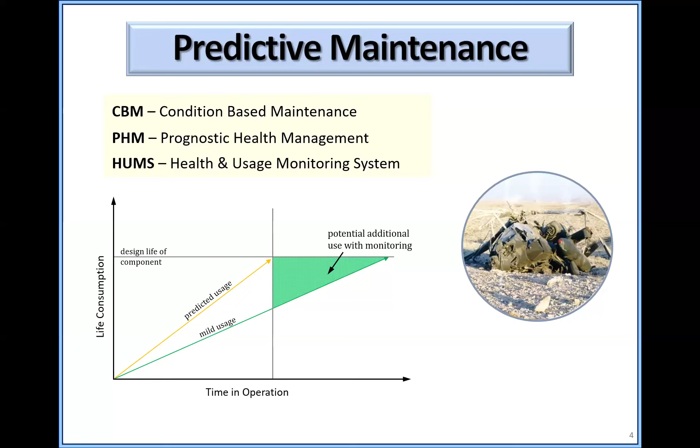On the other hand, sometimes we will have a premature failure, before the time that we have to inspect. The reason for that is sometimes the aircraft is maneuvering outside of the envelope. I had an A4 Skyhawk where the airplane crashed and the engine failed because the pilot went outside of the envelope. The temperature of the engine was too high, the blade got longer and touched the outside of the engine, broke it, the engine blew up, and the airplane crashed. So it was before the time that we had to inspect it.

You cannot find that problem just by doing this conservative maintenance. Sometimes the material that is used is wrong, sometimes the design is wrong. Sometimes there are problems that, although you spend all these millions of dollars, at the end you lose the airplane. You have a problem much earlier.

I hope this chart is well understood, because this is something that bothered me all my life in the Israeli Air Force. I felt that I'm spending most of my money... I was the one at the end that allocated the money for the different groups in the Israeli Air Force under my responsibility, and I felt that I'm putting a lot of money in the areas that Boeing, Lockheed, Israeli aircraft industry tell me to put.

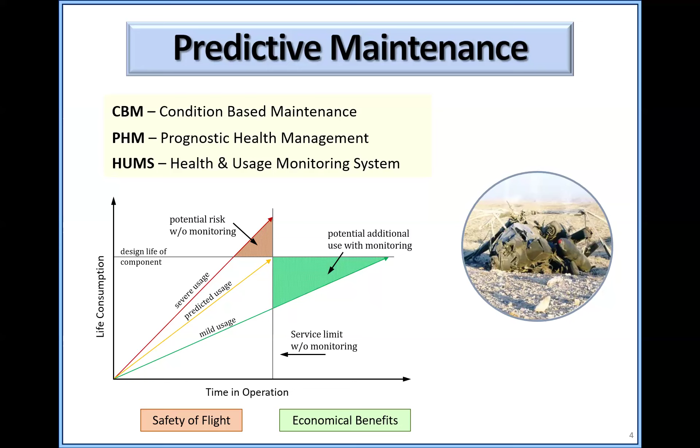With that, I came to the idea that we need to go to condition-based maintenance, and all these nice words that we are using. I'm happy that a lot of people and the DoD and a lot of organizations are using that today, but it wasn't like that in the early 80s when I felt that problem. I wrote in '94 a paper in Israel which said that we need to go for a different maintenance concept and go for condition-based maintenance.

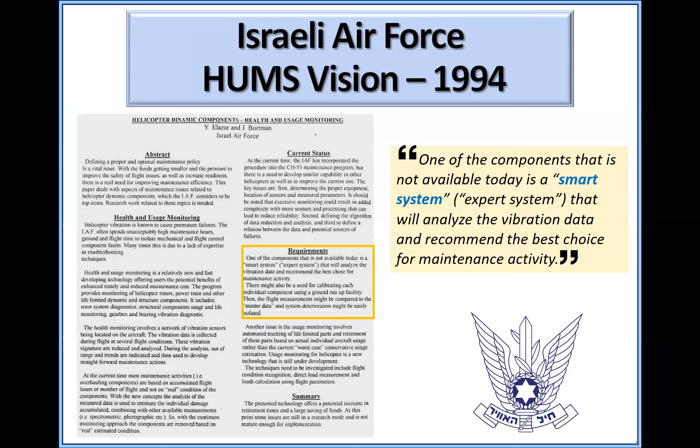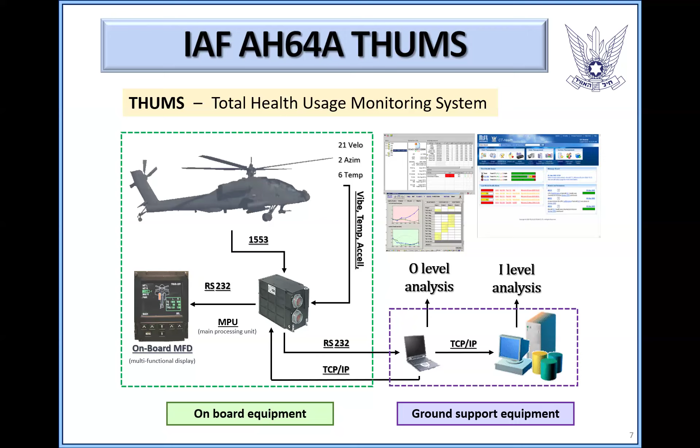In Israel, we developed a system that was installed on the Apache that collected data from 30 sensors, mainly vibrations. Based on that, we made a decision at the O&I level whether to replace parts or not. Later on, the Army and the Air Force in the United States developed something like that with Honeywell and Sikorsky.

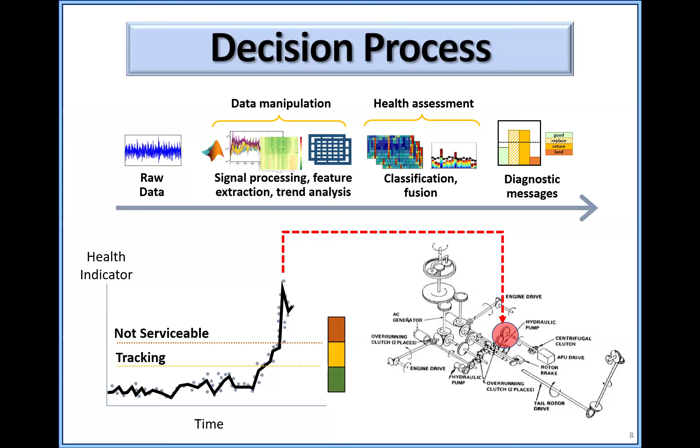Back then, the idea was to track the dynamic components of the Apache. We had critical locations, and based on the vibrations, we did analysis and had condition indicators. I'll say a few words about these things. Based on that, I was hoping we could go from the standard maintenance concept to condition-based maintenance. It was a very good system, and it's still being used, but we couldn't go to condition-based maintenance completely.

The algorithms weren't robust. We couldn't estimate the severity of the damage. We couldn't do prognostic RUL, meaning the remaining useful life. We felt the sensing wasn't good enough, and all the AI algorithms basically failed completely. We felt that we needed more understanding and better, more robust algorithms. So the system helped us in many cases find problems, but it didn't let us go to condition-based maintenance.

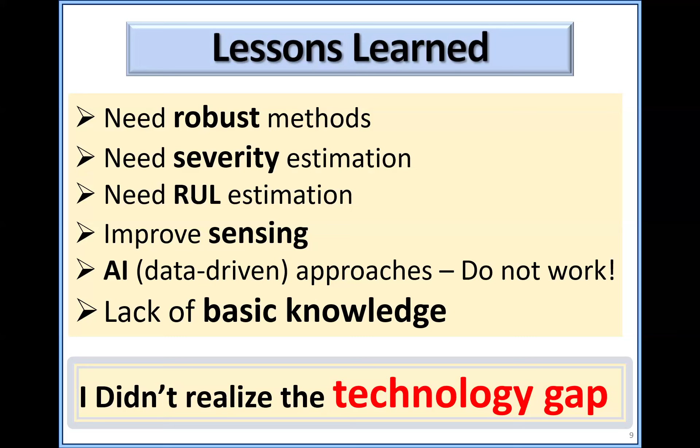So in my mind, when I retired from the Air Force, I decided to join the university. And I said, once I joined university, I'll try to develop better algorithms and better methods that I didn't have when I needed them.

One of the last things I did in the Israeli Air Force was sign a contract to buy the F-35. From our side, we put a lot of pressure on the JPO, the Joint Program Office, and on Lockheed to get some condition-based maintenance concepts. They put a lot of algorithms in the airplane, a lot of sensors, but I don't believe that even today they have full condition-based maintenance.

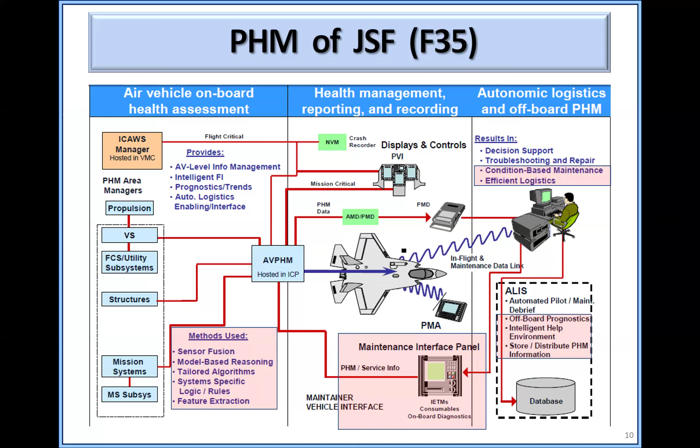The ALIS system is, in Israel at least, considered to be a very bad system. The user-friendly algorithms are not as good as they were expected. Also, the train industry in Israel is fighting to get condition-based maintenance concepts, and maybe I'll say a few words about that.

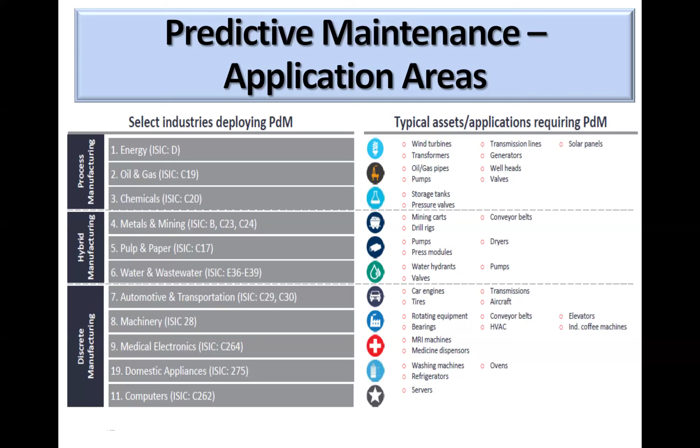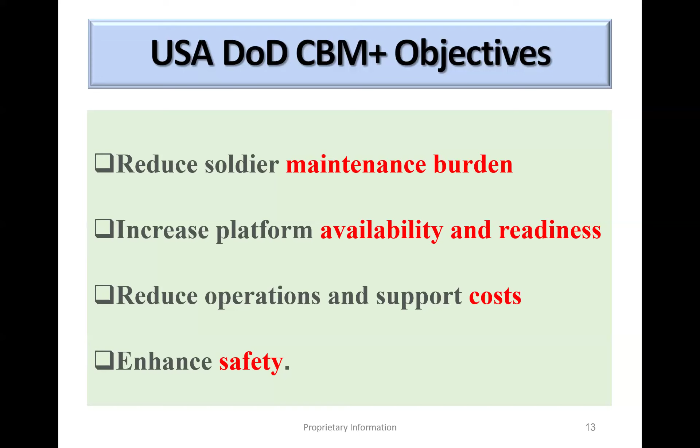The DoD, the American DoD, came with the CBM Plus. I don't know if you're familiar with that. They understand that maintenance is a big burden, and you need to improve the availability and readiness. In my opinion, it's very critical to save costs - when you spend the money, you are always limited. If you put your money on maintenance, you won't put it on other things that sometimes you need more. And even inside maintenance, it's better to do other things than over-maintain. When you over-maintain, you can cause problems too.

Several years ago, in 2022, I got a Lifetime Achievement prize at the PHM conference. I was very proud about that.

So when I established the lab 15 years ago, I wanted to create an Israeli Excellence Center for Advanced Health Monitoring for machinery. I said that I wanted to collaborate with as many organizations as possible, from academia, from industry, and so on. We have a lot of collaborations. The next time I'm going to put one more with Ed.

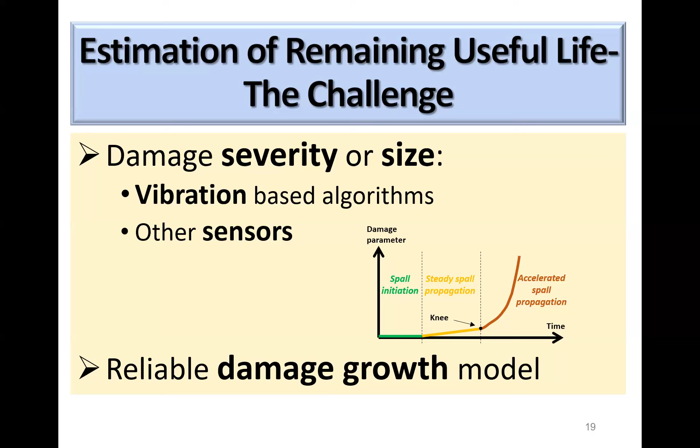So a lot of questions related to that. Although many companies and organizations say they can do diagnostics, which is assessing what the damage size is right now, and prognostics, which is what will be the RUL - for how long can I still use or fly with this component. So these are the challenges that we tried to face. And in the lab, we are concentrating on bearings and gears studies.

Basically, we started with physical models and experiments - that's what we did for many years in the lab. In the last 6-7 years, we added data-driven and AI models. And the problem is that when I was in the Israeli Air Force, I spent a lot of money with several companies that were doing AI, but the results were - you couldn't count on that. There are a lot of problems using AI in vibration analysis for health monitoring.

I'll say a few words about that later. So at the beginning, I said no AI people in my lab. In my lab, only physics-based and experimental work. You have a model, and you need to validate the model with experiments.

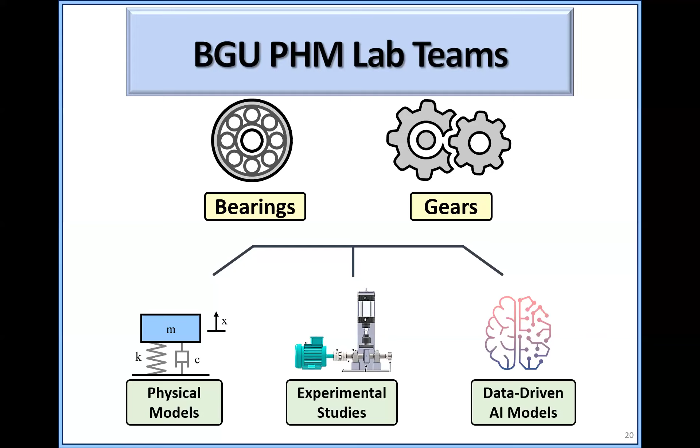And AI guys, they just want to write papers. They don't really want to maintain. That was my understanding. Well, today it's not so different, but I understand a little bit more than that. So I'm a little easier with them, but still, I think it's very dangerous.

In the Israeli Air Force version, inside there is a static swash plate and a rotating swash plate, with two bearings in between. The Israeli Air Force had a helicopter flying far from Israel. Suddenly they felt vibrations, found an island, and landed. What they found was that the bearings were broken. They were lucky to land - if they didn't, they would have crashed.

Now there's no way to inspect that. If you want to inspect these bearings, you have to remove the blades, remove the rotor head, remove the swash plate, and send it to the depot to open it up. And if you do all that, it takes two weeks before you can fly again - and you need to do that before every flight after.

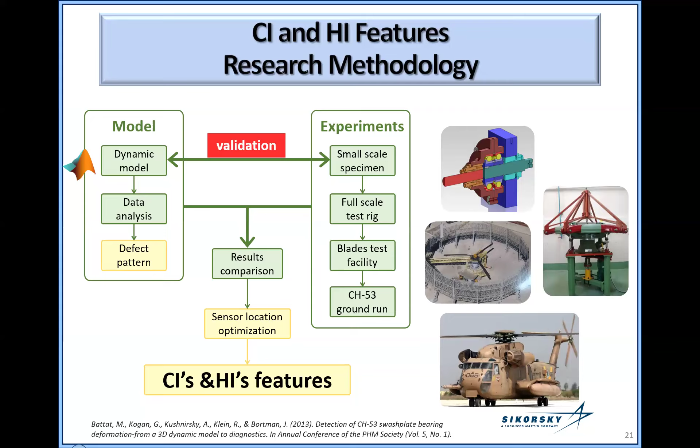So we had a lot of experiments with and without damage in the bearings. In parallel, we built a dynamic model - a student did that for his master's - and he validated the model against these experiments. Once validated, we could run many cases and develop indicators that could tell the Israeli Air Force if there is damage or not. Based on that, they are flying the CH-53. So this is an example of the work that is done.

Another type of work we do is for prognostics - we are running endurance tests. Some of the work is done in our lab, and some is done at AFRL, the Air Force laboratories in Dayton. We have a collaboration with them. They run, for example, bearings for us in different conditions.

From the experiments we get vibration levels, build a dynamic model, and use finite element analysis to calculate the damage in the bearings - I'll show you how we do that later. We also use ODM, oil debris monitoring, a system that measures the size and amount of particles in the oil. We developed an algorithm that, based on the ODM data, can calculate the damage in a bearing, for example.

We have several papers with them about that. And from the finite element analysis, we can calculate the fault propagation model. Based on all of that, we developed RUL estimation models that we are using today.

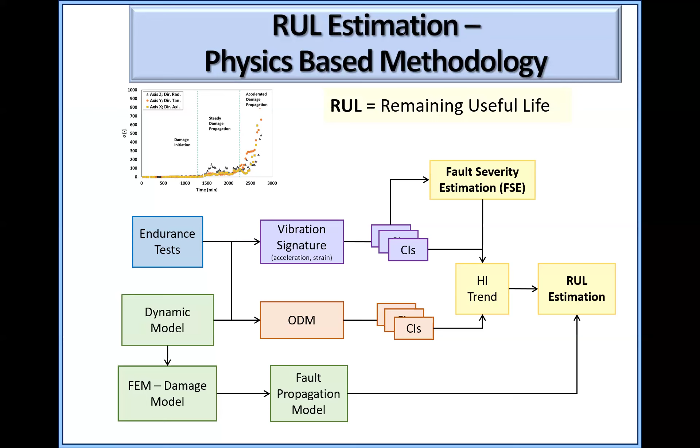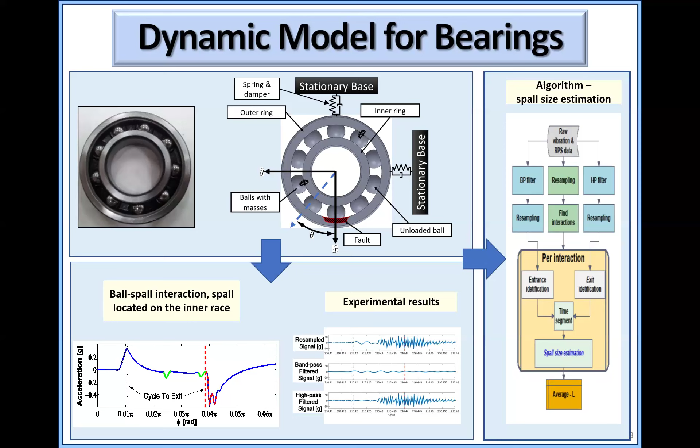And this is the algorithm - I won't go into the details, but it's based on understanding the dynamic behavior of the bearing at the entrance and exit of the fault. So this is just an example of how you can develop algorithms like that.

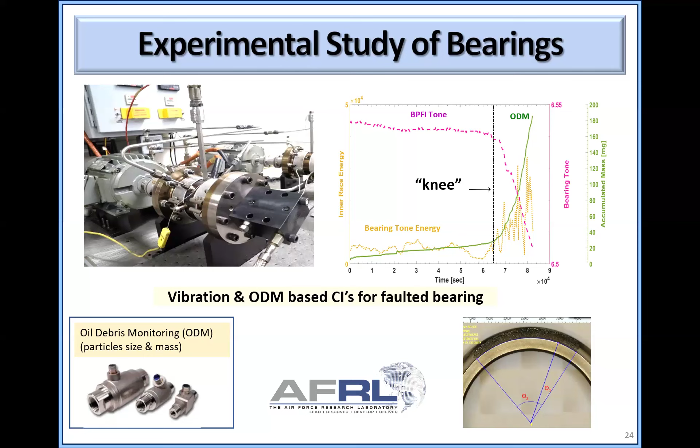Several of them are based on ODM, the oil debris monitoring. Some of them are using algorithms that factor the bearing tones. Some of them are using energy algorithms. I won't go into the details because we are short on time, but there is a lot of work that can be done with that.

This work is related to prognostics, to the damage growth in bearings. We try to understand how the damage grows in the bearings. And we spent several years running endurance tests and studying the literature, and coming up with our findings.

In the upper level, you can see the crack initiation phase, where the cycles cause some fatigue damage, and the first piece would leave after that. In the second stage, the damage starts growing, and we wanted to understand how the damage is growing.

So all that work was done both experimentally and using finite element models. And we found that the fatigue growth is caused by the ball hitting the corner of the spall after the first piece left, and two different cracks are being developed.

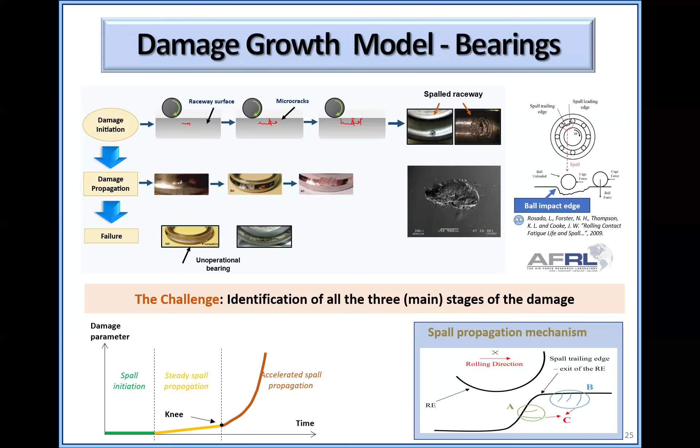Some of them are from the surface, other ones are from below, and they are connected. And then we get another piece that leaves.

You can see here simulations of the damage. You can see, for example, on the top, the cycles where the first initiation occurs. In the lower one, you can see how the hits of the ball start growing. I'll take it to different stages.

So there is damage growing up and down. And this is in a fast mode.

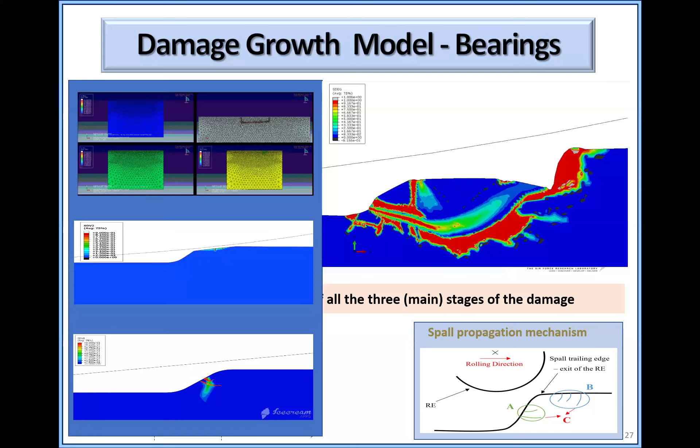So then another piece leaves, and we have a new spall, longer, and so on. You can see it in the right lower corner. And based on that, we developed a model that you can use for prognostics.

I won't go into all of that, but we have models like that for gears as well. I'm short on time, so we have indicators for gears.

I want to say a few words about sensing. We realized that accelerometers also have disadvantages, and we understand that we want to be close to the damage. We want to have a good signal-to-noise ratio. So we started using, in addition to accelerometers and measuring temperature, the ODM, FBG, and small, tiny cameras to inspect the health.

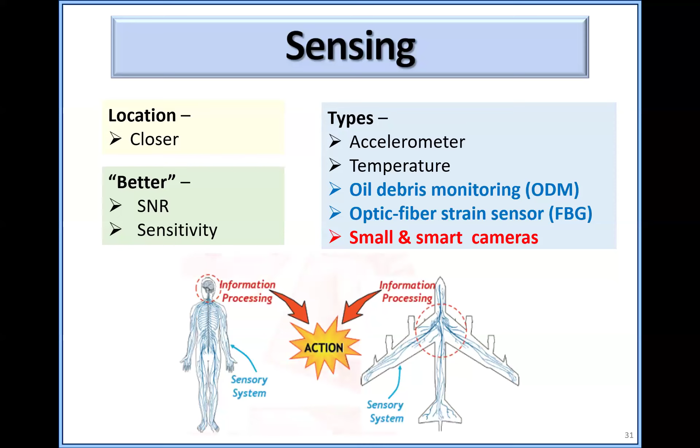Let me run quickly. Those of you using FBGs are measuring strain on a fiber optic, and from the change of wavelength you can calculate the strains. Mostly people are using it for measuring strains in structures.

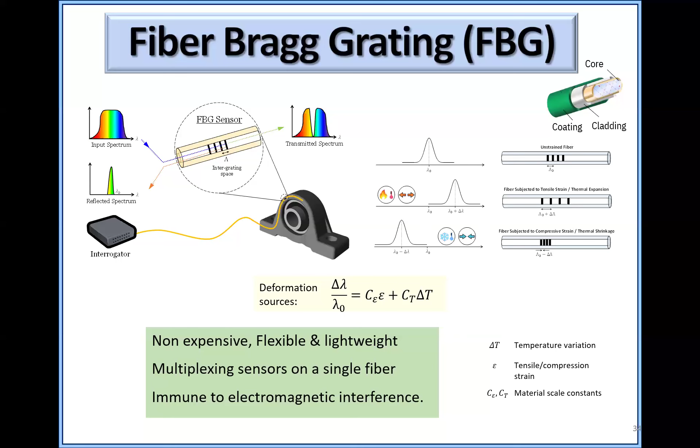We are using it to measure the behavior of bearings and gears. And we have several papers where we were able to correlate between the damage sites, different damages, to the strain level, and some analysis that we have done.

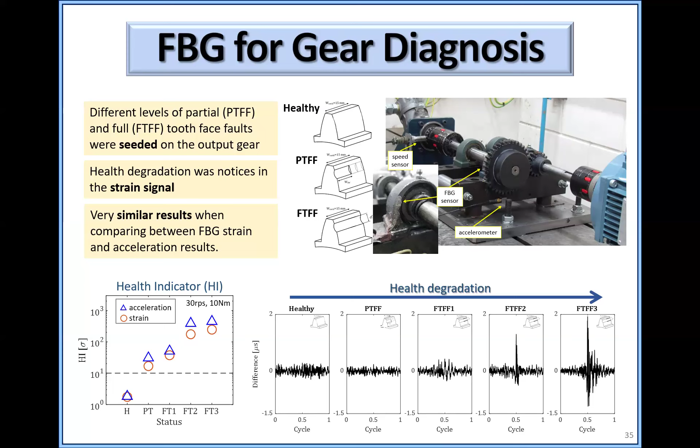As I'm short on time, I won't go into details, but if someone is interested, we have a lot of modeling.

Several years ago, I met a company that makes tiny cameras for medical purposes. They were selected by NASA to put those sensors in the satellite pipes, to check the health of the pipes before refueling the satellite. And then I said, okay, if you can use that in space technology to assess the health of components, why can't we do that in aviation?

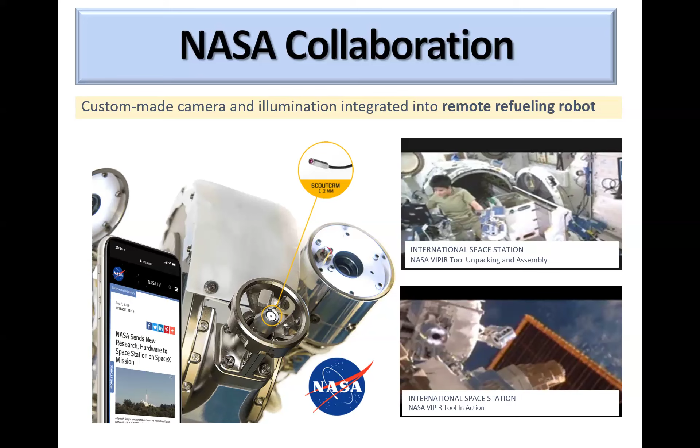So we lost in the Israeli Air Force an Apache because the push-pull rod that transferred the pedals of the pilot to the tail, controlling the tail angle of attack, was disconnected.

All these rods which are outside of the airplane are inspected every pre-flight. And the ones that are inside, in order to reach this point that you can see in the red mark, to see this connection, you need to remove the pilot seats, you need to remove the fuel cell. It's a long, long way to inspect that, and you cannot inspect that.

So what we did with that company, we installed those tiny cameras inside that bay. You can see a picture taken, and we connected it to a plug. And now the technicians connect to the plug, and they can see in the iPad the integrity, they can check the integrity of the system.

So with this concept, you can inspect areas which are not related to rotation, areas like landing gears, and many other areas. You fly with the camera, you don't need to do anything, and you can inspect it.

But then I realized that if you have a good picture, a good image, you don't need the technician. You can just put a computer on board and develop algorithms that will check for corrosion, for the safety wire that is there, the solid parts should remain solid.

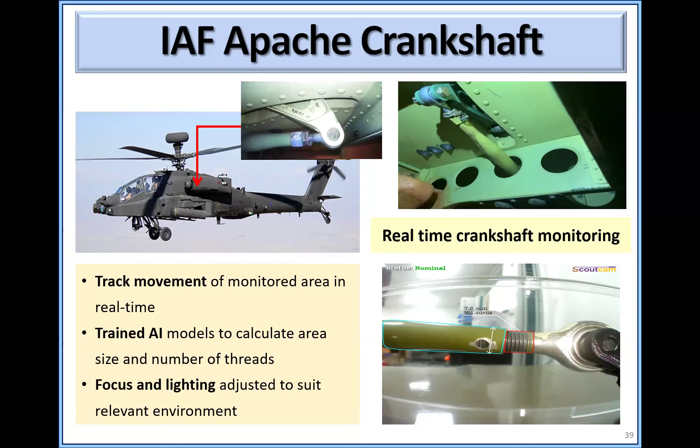And from that point, the company changed direction into aviation. And there are, for example, applications for landing gear. You can check if there is leakage in the landing gear.

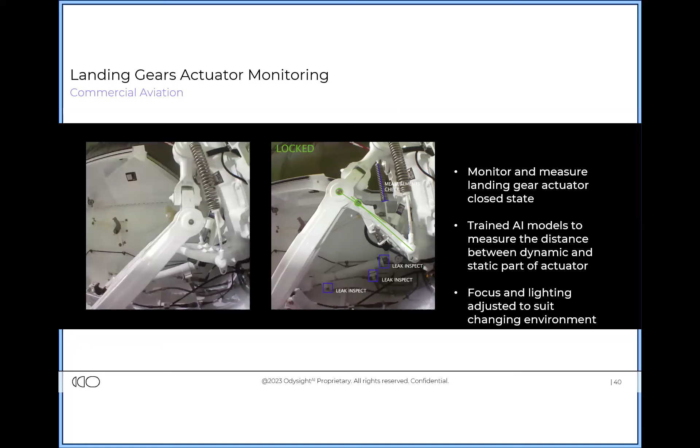You can check from the trajectory of the landing gear that the bearings in the different locations are not wearing out. We lost an F-16 in the Israeli Air Force because during landing, the locking system jumped out, the main landing gear collapsed, and the airplane turned over. The pilots were lucky enough to eject in the last minute.

Today, you can eject on zero-zero. On the ground, you can eject safely. So they were lucky, but we lost an airplane. And the bearings were completely worn out.

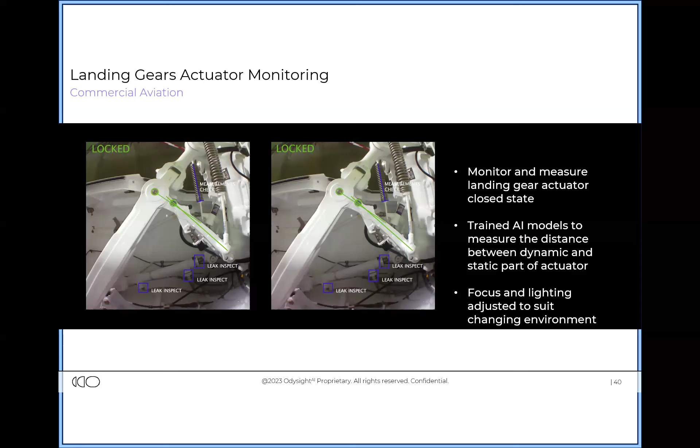We are installing now in most of the Israeli UAVs, tiny cameras connected to computer, and areas like belt integrity, filters, throttle. Many inspections are done with the system by itself with no technician around.

We started saying that we don't have a pilot. The pilot is remoted, and you don't need a technician as well. The airplane can inspect itself, let you know that everything is okay and is ready for the next mission. So you improve the readiness.

You don't have to open panels. And the camera is not tired. It can do the work in the middle of the night.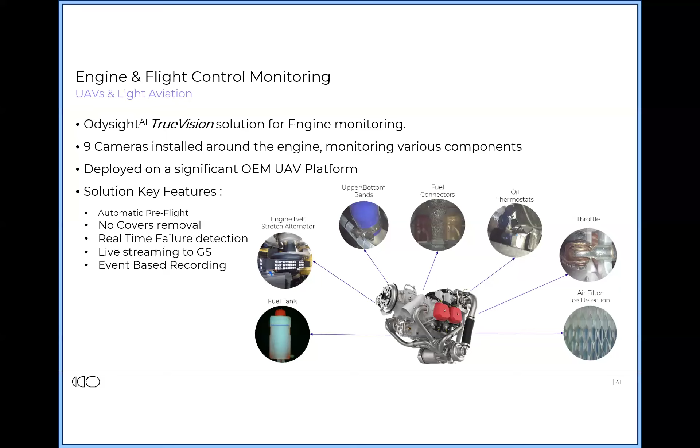When I was the head of the maintenance unit, when the helicopters used to land, always they land at midnight or very late, and then you send the technicians to inspect the airplanes for the morning flights, and then you are not sure that they can do the work as accurate as needed. They are tired. A camera doesn't get tired, and the probability of detection is much better.

So we have a lot of applications today.

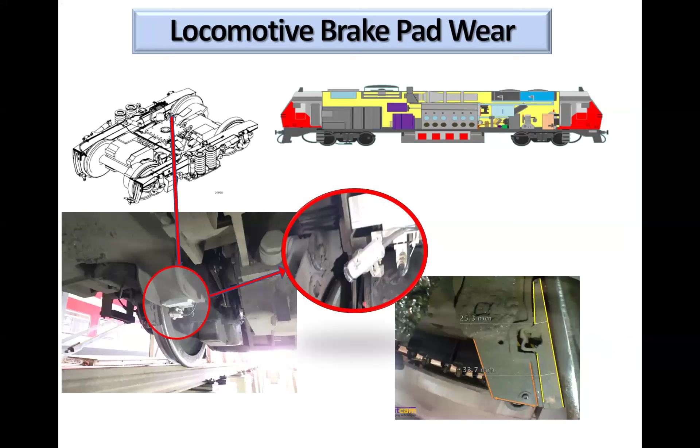Let me jump ahead. I'll say a few words about AI.

Deep learning for fault diagnosis of rotating machinery using vibration used to be a kind of buzzword, and there were several waves of deep learning. I'm not an expert, not in deep learning. I'm not an expert in that area.

I'm working with experts, but I remember when you couldn't get a grant if you didn't write AI in your grant. In picture classification and speech recognition, there were a lot of revolutions, and they developed features to identify what you have in a picture and so on.

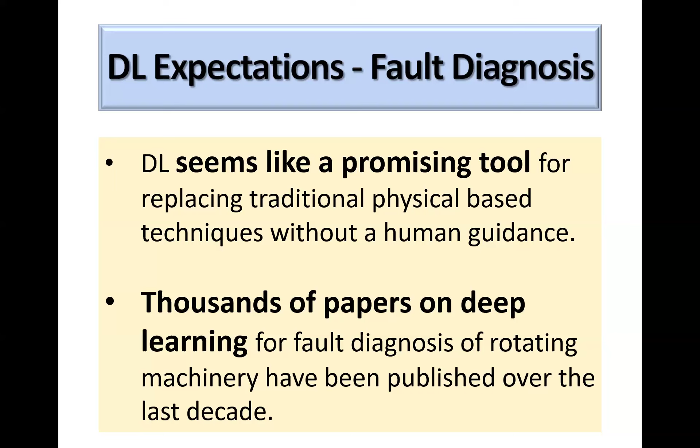And it looked like a very promising tool, not only for these areas, but also for analysis of the vibrations that we measure with accelerometers for health monitoring. There are thousands, maybe millions of papers written about using different algorithms and different methods using AI for assessing the health of machines.

And the real problem, in my opinion, one of the problems, is that in the critical locations you have very, very, very few, even sometimes zero, data about...

...failures in critical locations. For example, in the F-35, as far as I heard, they are planning to develop the algorithms after they have 200,000 flight hours. That's what I heard. Now, I hope in the first 200,000 flight hours, they won't have too many failures. They won't lose thousands of airplanes because of damage.

So the database that they will be using is probably few-shot or zero-shot learning. And the problem is to move from experiments to real life. You cannot do that directly.

Transferring across different conditions, different machines. Even if you're using the same bearing on the same machine several times, you'll get different data. And you need a lot of labeled data in order to train your system, in order to use it.

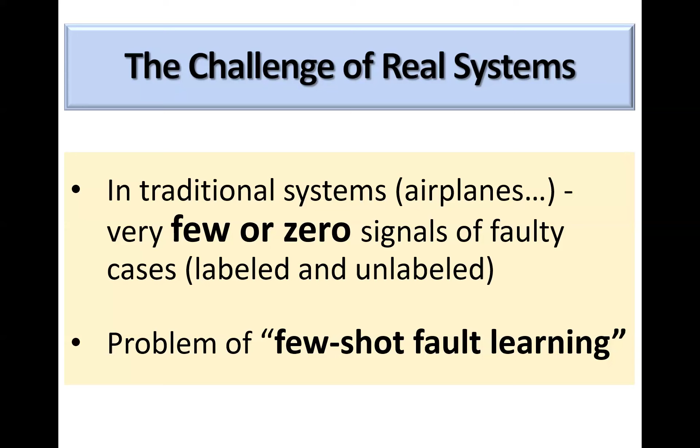So in my opinion, no one is using AI-based algorithms alone for critical locations to maintain its fleet. That's what I think. Of course, I didn't visit all the air forces and all the users, but those that I visited, they are not doing that.

One challenge that we realized, and we are trying to solve, is to transfer in an identical machine from different operating conditions, meaning I train my data on certain conditions and I move to other conditions. The other one is to transfer from different machines, meaning I learn on one machine and I go to another one.

If we solve this, probably we could develop algorithms training in the lab, and then use it in the airplane.

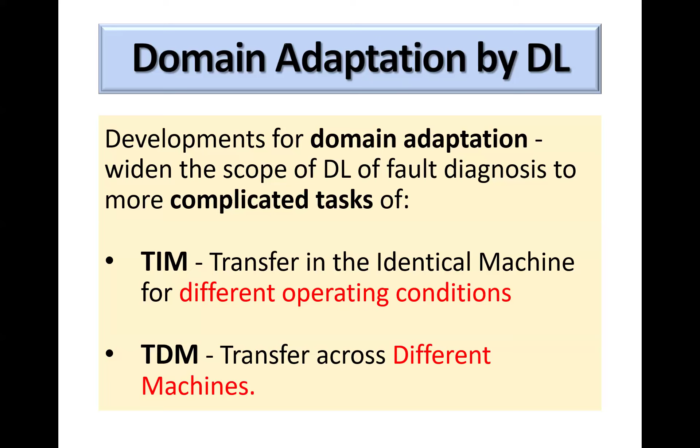But it's not solved today. There is a lot of research right now being done in this area. And we did a literature survey, and we found that none of those studies are being used in real life.

It's very, very easy, I can tell you, to write a paper about that. If I have data, I can train the data, change several parameters, and on the same machine, same conditions, I can identify whatever you want. I've done it very easily.

And us in the academia, we need papers, so we can write many papers. So this is a great area. You can develop very fast papers. You can get promoted. That's an industry that feeds itself. But if you are responsible for flying airplane, for maintaining airplane, this is very dangerous. You cannot do that.

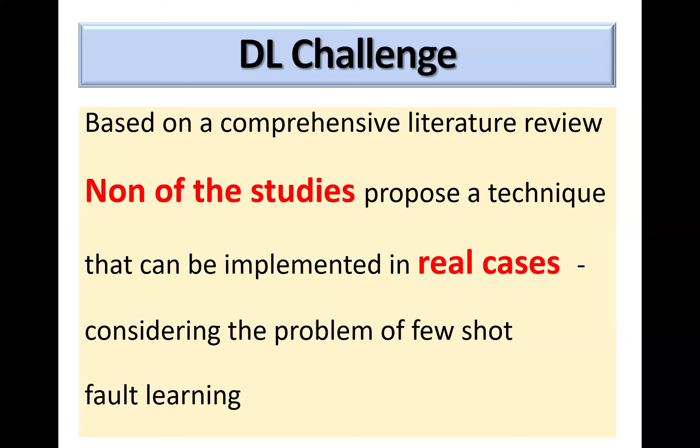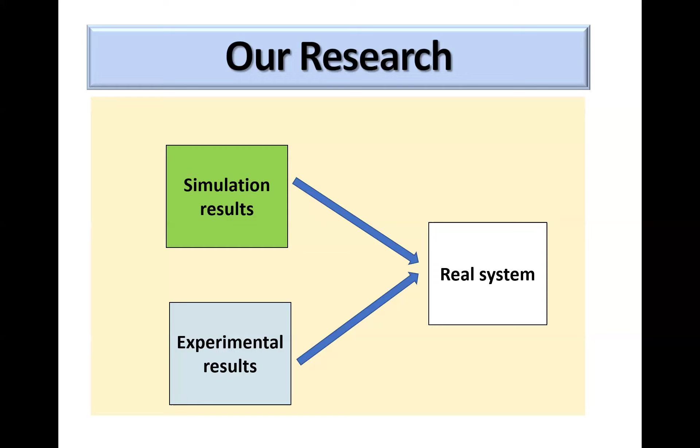What we are trying to do in the lab is use experimental results and simulation using the models that I described before. Based on the combination, the hybrid method, we are trying to check and develop methods that will work in real systems in real life. So this is just a teaser on that area. I hope to have a collaboration with your center related to that, because I'm very anxious to come up with a solution for that problem.

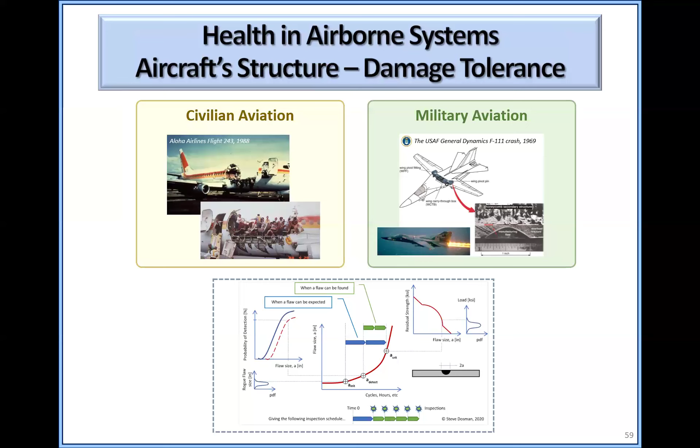I'll say a few words about digital twin and then I'll sum up. I have to sum up on time. So the concept of digital twin looks like a buzzword. When I first saw it 10 years ago, I said, that's another buzzword that came and will go. Now, with the years, I found that you can do things with that.

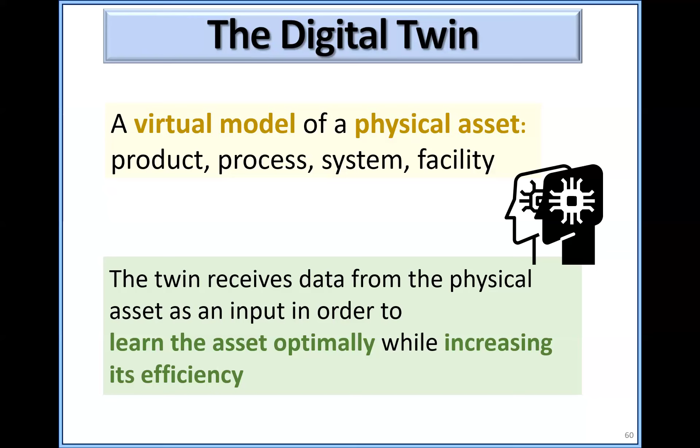If you have a good model, and if you have data and sensors on board, you can get the data from your individual airplane or individual asset, put it into the twin, and measure and check the health or check other things. And you can use it for many, many things.

Let me just show you the results of a project that we did with the train industry in Israel. What we did, we took 5 critical components and we developed a twin for those components. We trained the system. Once we had algorithms that can identify damage in different locations, we use that - they measure the data, they put it through the algorithms, and if something is wrong, they go and check the area. If they find something, they fix it.

If they don't find anything, they understand that the model is not good enough, and they go back to the above system and they improve the model. So this is a learning process where they get better and better, and it saves for them a lot of man-hour compared to removing parts just because the OEM told them to remove.

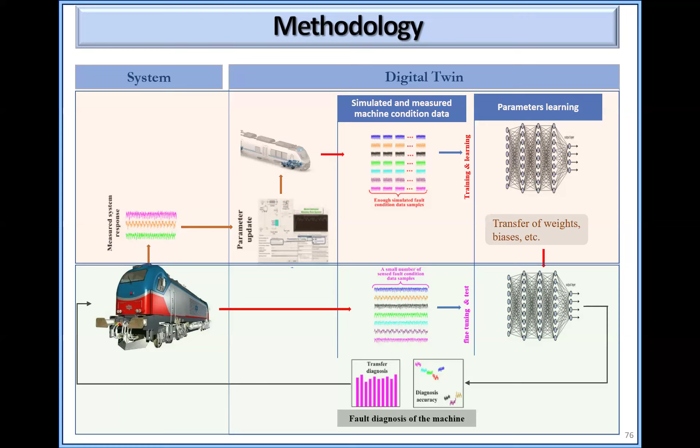Okay, so just to sum up, I talked about machinery condition-based maintenance. I think that even today it's a big challenge. We can save a lot of money and improve readiness, improve safety, if we have a good solution for that.

We need to improve sensing. We are working on several directions. I know that others are working in different directions, and I'm sure that in 20 years, it will be like our body. If something is wrong in the heart, you will feel it through pains or through sensors that you put outside. You can do an EKG. You don't take out your heart every 600 flight hours and inspect it. You do that only if all the sensing methods tell you that you need to do something. The engine is like that. The transmission in the helicopter is exactly like that.

AI approaches - okay, I suffered a lot from trying to use it in the Israeli Air Force. There is a big challenge there, but I think we can solve it. The academia, the community can solve it. And the last thing is the digital twin. I didn't have time to talk and show you more research about that, but I think there is a lot of potential in using these concepts in engineering. That's it.

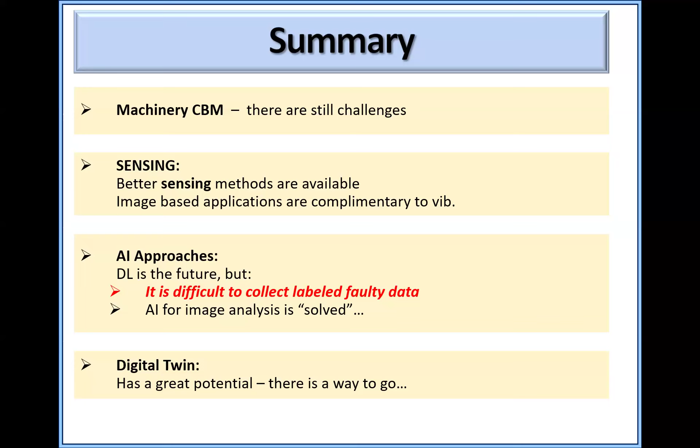Thank you so much, oh I know that already, I did it during the pandemic. I was doing a sabbatical in the architectural engineering department. The first 6 weeks were without pandemic, then the pandemic hit and the rest was at home. I have to talk to you about architectural acoustics actually, we have an issue to solve in our new building, so I'll reach out. Okay, well I'm actually a mechanical engineer, I was at the architectural department just because I knew the department head back then. Alright, well if you know that stuff, we'll talk.